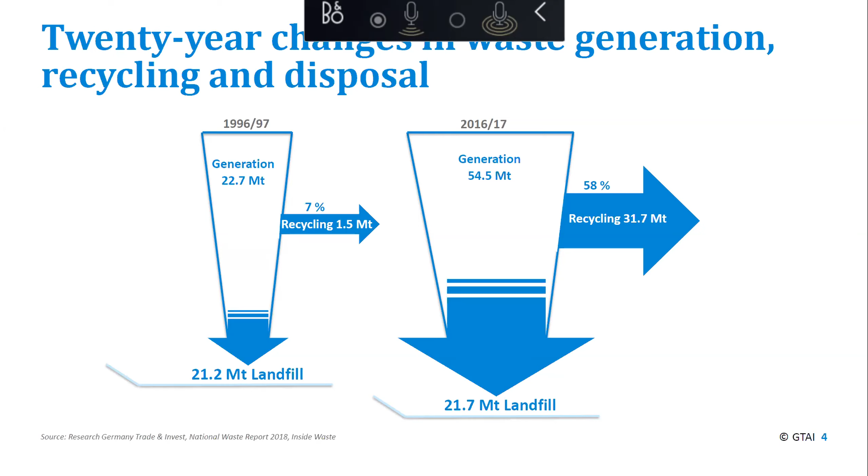When we then have a detailed look at the recycling data, it's very interesting that there are quite significant differences between the recycling rates in certain waste streams. For example, construction waste and metals score very high recycling rates. Paper and glass are somewhere around the average. And very noteworthy is the extremely low recycling rate for plastics, with only 12%.

But if you interpret this data, I think the most important point is that all these recycling figures include substantial amounts of exports. So that means not all this recycling takes place here in Australia, but these numbers include material that's shipped and supposed to be recycled overseas. For example, for plastic recycling, the export ratio is almost 70%. That means domestically here in Australia, maybe only around 100,000 tons of plastics were recycled.

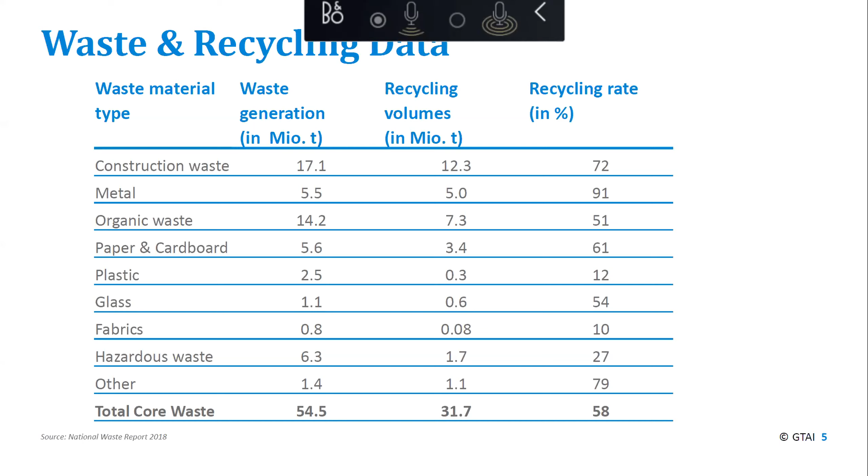And for metals, the export ratio is about 50%. For paper, it's still around 40%. So that shows there is a huge reliance on exports within the Australian recycling industry. And in the last financial year, Australia exported almost 4.4 million tons of waste materials. As you can see, that mainly consisted of metals, plastics, and paper.

And when it comes to plastics, this also included large amounts of unsorted mixed plastics, which are often highly contaminated. Like other waste, most of these mixed plastics were in the past mainly shipped to China. That then, however, changed dramatically when China imposed harsh restrictions for waste imports, limiting the acceptable contamination levels to 0.5%.

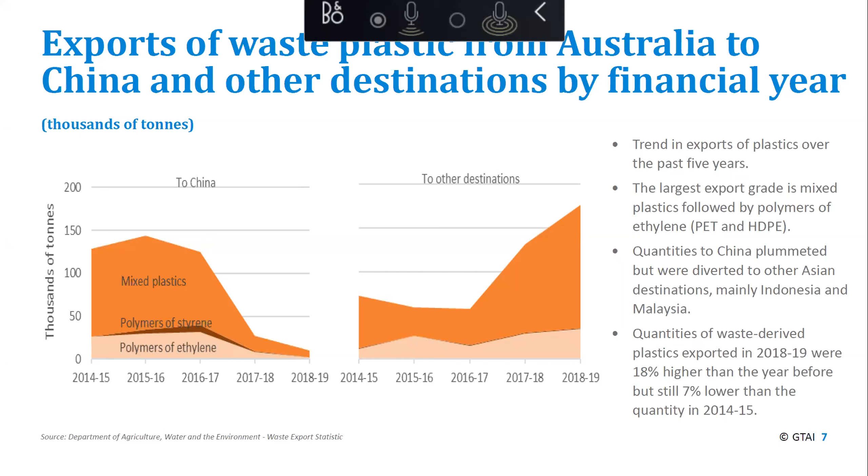But Australia then found other destinations to export waste. For example, we see a huge increase in waste shipments to Indonesia, Malaysia, or other Asian markets like Vietnam. But this high reliance on exports in the Australian recycling industry becomes more and more unsustainable, because other countries are now also starting to restrict the import of waste.

Therefore, the Australian government responded with an ambitious national waste policy, which stipulates numerous targets. A key measure is the implementation of export bans for certain waste streams, and moreover, the national waste policy also aims to achieve an average resource recovery rate of 80% by 2030. So that would mean an increase by 20% from the current level.

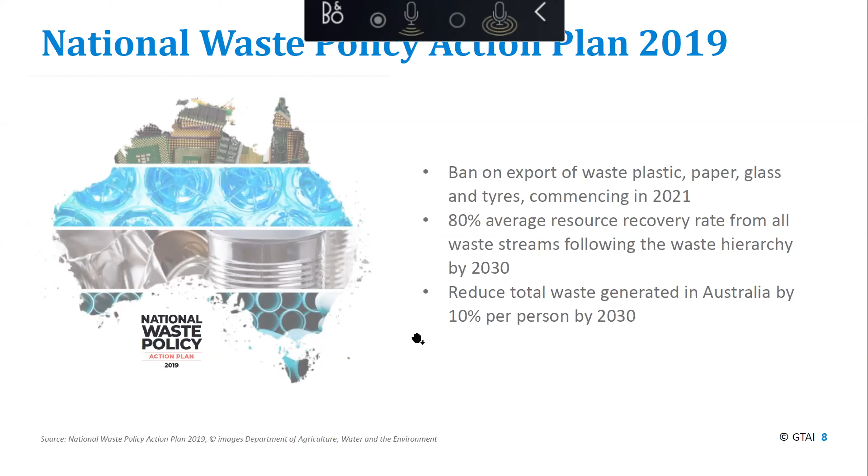These mentioned export bans will be implemented in successive steps. The whole process will start in January next year with unprocessed glass, followed by mixed plastics and tires. And a very important step will then be in July 2022, when the export of sorted single polymer plastics will also be banned, and eventually mixed paper will also be subject to an export ban.

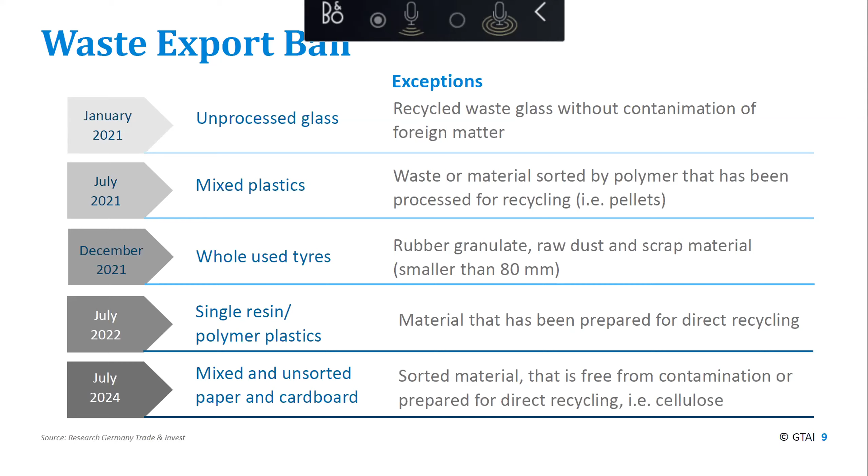But it's very important to note that these export bans are not all-encompassing. They mainly relate to unprocessed materials. For example, in the case of plastics, it will still be possible to export materials that have been sorted, washed, and reprocessed for further use, for example, in the form of pellets.

The important thing, however, is that this capacity to sort and reprocess all this waste does not yet exist here in Australia, and therefore must be built in the coming years. And therefore there's a significant requirement to invest in domestic recycling capacity. So the export ban alone means that Australia must handle an additional 650,000 tons of waste per year.

So to facilitate all this required investment in recycling capacity, the Australian government established the Recycling Modernisation Fund, which provides direct cash incentives for investment in recycling capacity. This fund is provided with $380 million. The federal government in Canberra contributes $190 million, and the rest is contributed by the states and territories, who also administer these funds.

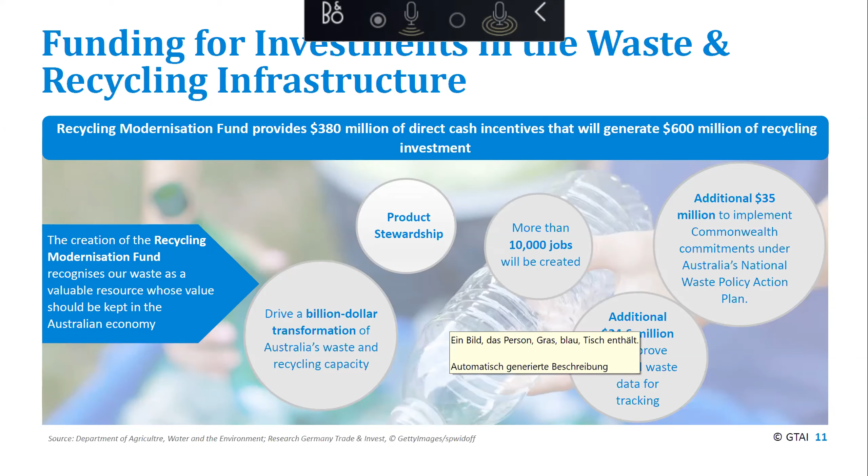So this, of course, also offers opportunities for German companies to provide solutions for the challenges in the Australian waste industry. I don't want to go too much into detail here, but one challenge is commingled and highly contaminated municipal waste streams. In the current situation, many Australian households, for example, have only one yellow recycling bin where plastics, glass, metals, and paper are collected together, and this leads to high contamination levels, for example, with glass fragments.

And many material recovery facilities in Australia currently still lack sufficient equipment to sort these contaminated waste streams. So there are huge opportunities to provide sophisticated sorting equipment. And of course, also the demand for plastic recycling equipment will increase. For example, there will be increased demand for washing machines or machines for pelletizing plastic.

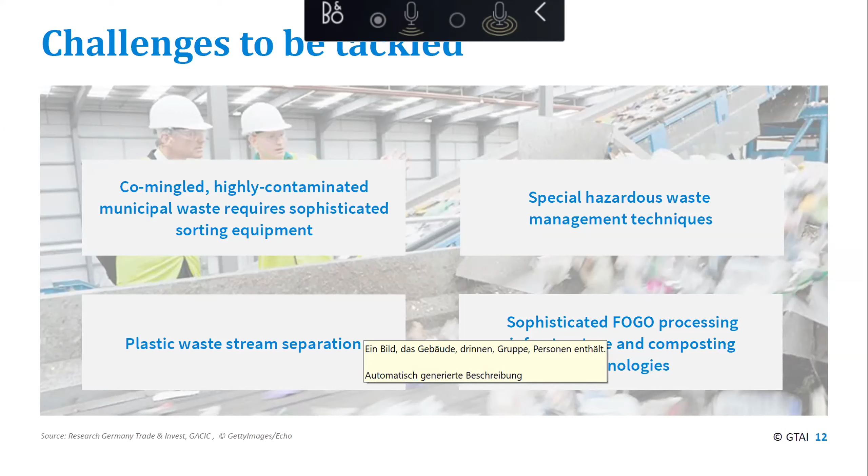But it's not only the government that starts initiatives to improve recycling, also the private sector joins in. One example is the Australian packaging industry, and via its industry body, the Australian Packaging Covenant Organisation, the sector formulated the so-called national packaging targets for 2025. There are a number of ambitious goals, for example, to increase plastic packaging recycling to 70% and ensure that there is an average recycled content in all packaging that comes to the market of at least 50%.

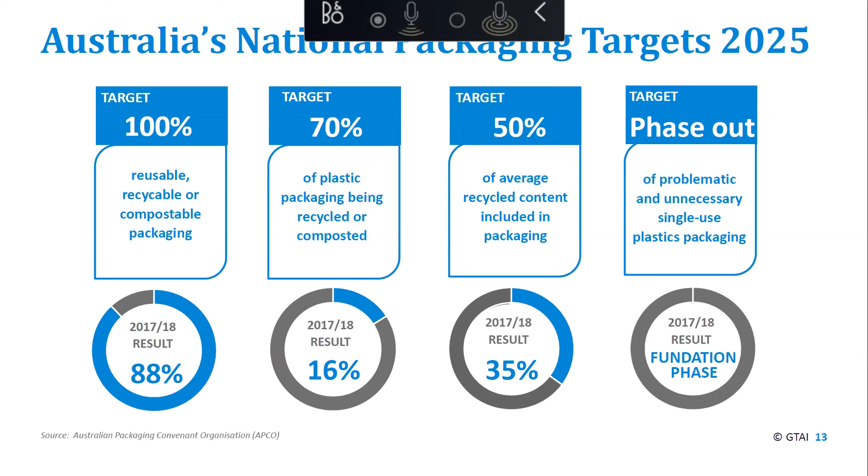To achieve these targets, there is still a requirement for increased efforts. For example, the latest results show that the recycling rate for plastic packaging is only 16% at the moment, and that packaging only consists of 35% recycled content. So there is still a lot to do, but the Australian packaging industry rises to the challenge, and many companies start activities. For example, packaging giant Visy intends to invest $500 million in the next years.

Visy just recently bought the glass manufacturing business from the American company Owens-Illinois here in Australia, and intends to increase the recycled content of glass bottles from currently 1/3 to 2/3. So company boss Anthony Pratt already announced that he will invest to upgrade the technology of these Australian glass manufacturing plants. And the Pact Group will invest $500 million in existing and new facilities to increase recycling.

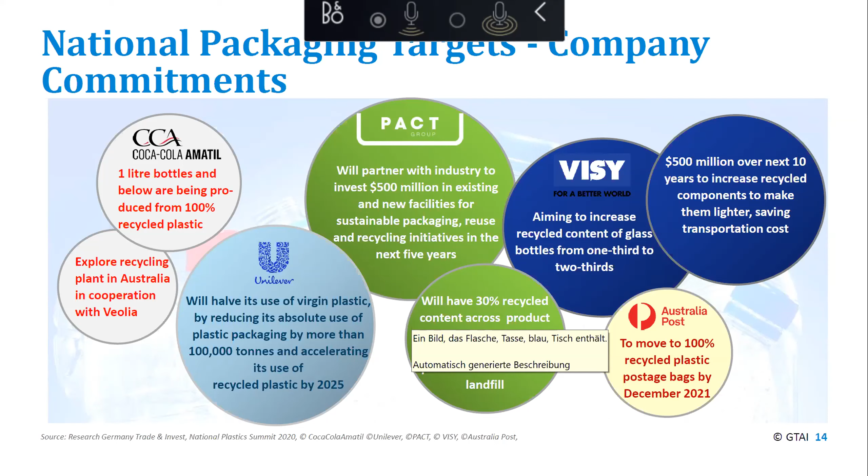One major project is a new $45 million plastic recycling plant in Albury, which is constructed together with joint venture partners like Cleanaway and Asahi Beverages. And this facility will recycle more than 20,000 tons of PET bottles per year. Also, Coca-Cola mentioned plans to build a plastic bottle recycling plant in Australia together with French company Veolia, although there are no confirmed details yet.

There are also many initiatives from supermarket chains. For example, Woolworths works to reduce packaging in general and also wants to increase the recyclability of its private labels. Coles reported that it already diverts almost 80% of its waste from landfill, and Aldi also pledged to drastically reduce plastic packaging in the next 6 years.

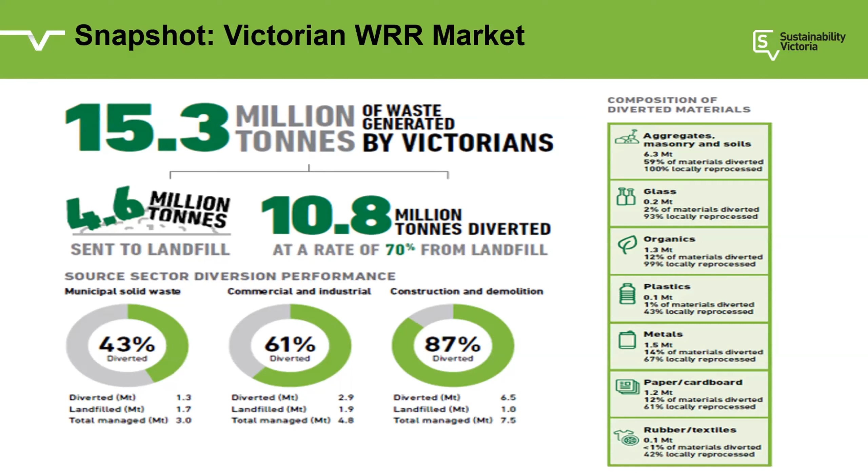Again, Heiko's covered this well already, so I won't really speak about it. Just to say that obviously it's a 4-stage process. The ban's coming in place starting in January of next year, and following on from the China Sword policy, we have also seen stricter measures being implemented by Southeast Asian markets, where we would export our plastics particularly, and that's where we would have an effect. So what this really means is we're going to have increased waste material here in Australia, and this opens up large opportunities to recycle and reprocess these materials, and I'll go into them in a little bit of detail.

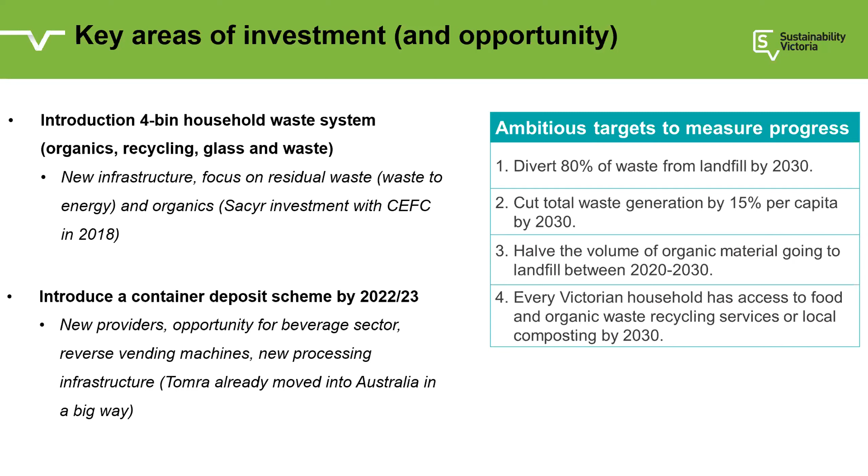So I just wanted to touch on the waste to energy, as I'm sure plenty of people listening today are keen to understand what Victoria is looking to do in this space. So the good news, the Victorian government is interested in investing in this space, but is keen to see best practice in the state.

But the government has also indicated that it does not want to see this happen at the expense of recycling materials first and foremost. And to this end, the policy sets out a cap on the amount of material that can go to thermal waste to energy facilities at 1 million tonnes per annum. This is still being developed at the moment and in consultation, and a policy statement by the Victorian government should be released by the end of this year or early 2021.

Now, to note, the cap does not apply to pure organic streams, for example, being treated by anaerobic digestion. And as I touched on earlier, there will be a $10 million waste to energy fund targeting these organic waste energy projects coming out early next year. There is also a commitment by the government to review that cap regularly.

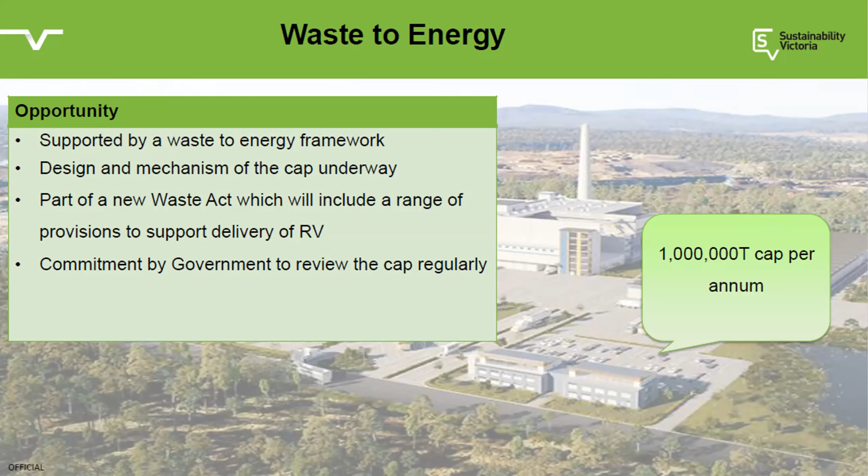So the next couple of slides, excuse me, I just have a drink of water.

So the next couple of slides speak to the key materials that are being targeted under the Recycling Victoria policy. And these are basically areas where we do not have the capacity currently within Victoria to meet the upcoming export bans. So plastics, the opportunities will be in reprocessing capacity for all types of plastics, but particularly plastics 3 to 7. So we do have a mature enough market on clear PET, so food grade, but we really have opportunities in polymers 3 to 7.

And as Heiko said already, there's opportunities in separating the polymers to meet the export bans, and also there will be opportunities in remanufacturing the plastics, as 63% of all plastics that are recovered already in Victoria are exported for recovery. And it is anticipated by 2025, we will need an additional 280 to 300,000 tonnes of capacity for plastics.

So paper and cardboard, as you're probably well aware, it tends to need larger scale investment. So there's large scale opportunities for paper separation at the MRFs, but also pulping facilities. There's also additional capacity to manufacture packaging materials such as tissue, eggs, and boxes being the obvious one.

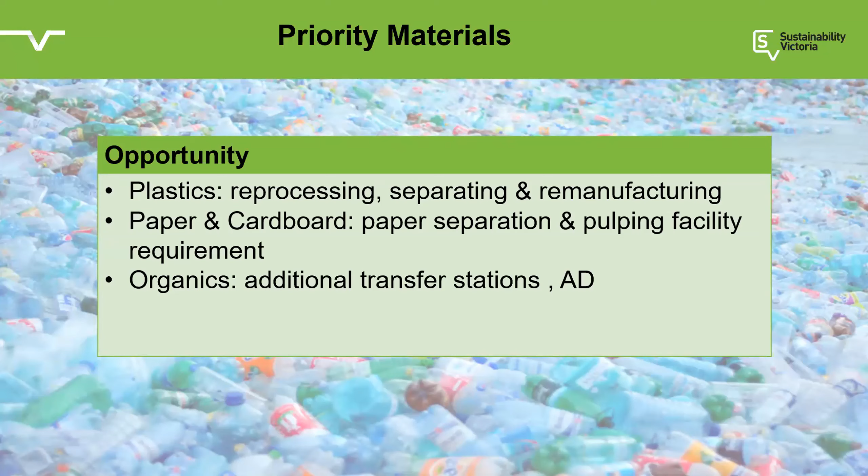When it comes to glass, it's not as critical as it has been in the past, and this is mainly due to building up capacity in the market through the likes of Alex Fraser, who are processing lower grade glass into a bitumen supplement to be used in road construction. But there is opportunities with the new curbside glass bin and the container deposit scheme. We're going to need additional beneficiation capacity in the state. So there is existing bottling plants here within Victoria, and there is opportunities to provide beneficiation glass to these bottling plants. With tires, there's opportunities to process the crumb granules and powders to meet that export ban again.

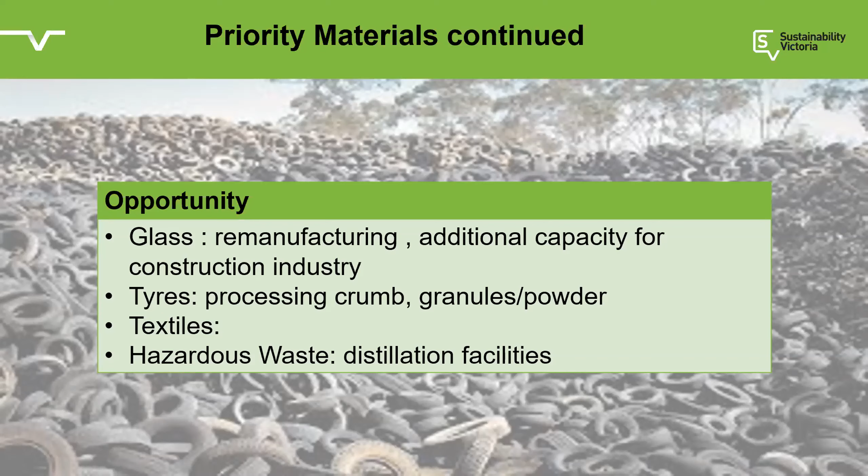And then when it comes to textiles, we have small niche projects already up and going in like carpet recovery, but there's a critical gap in the market with the majority of textiles going to landfill, 98%, and the government does have an appetite to recover, and there is significant opportunity to increase that recovery. And then lastly, hazardous waste. We already have a funding program up and running, as we discussed earlier, but there is opportunities to increase the capacity to safely and effectively manage solvent waste, such as expanding distillation facilities.

So in summary, there is sector and policy changes that are transforming the waste industry in Victoria. There are significant government funding programs underway and being rolled out. And there's investment opportunities available both now and into the future to meet the capacity requirements Victoria needs. And lastly, I would encourage you to get in touch regardless of what funding may be available now or into the future, and we can speak further on any investment proposals you may have.

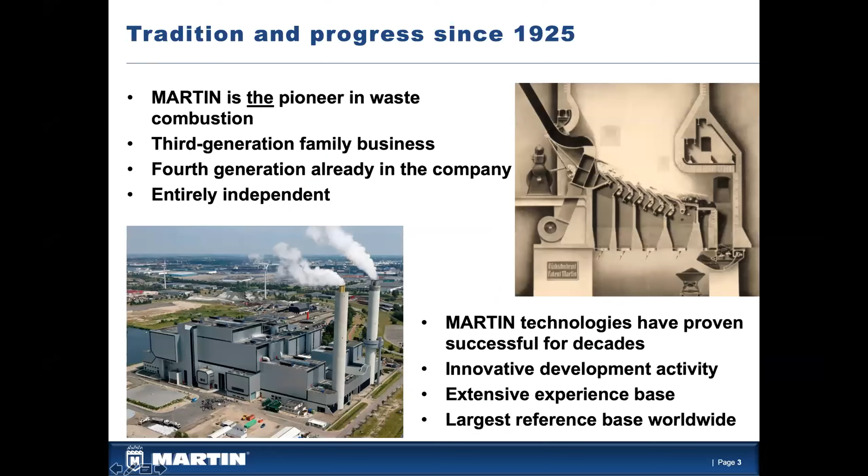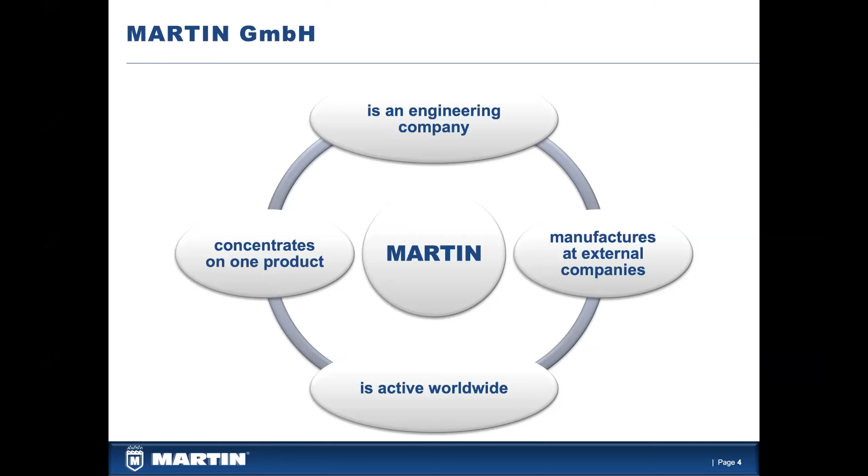That's a picture of the Amsterdam plant. So German companies as engineering companies come here with the technology to manufacture and produce waste to energy plants worldwide. The waste to energy plants are a main part of our work, plus composting. And I will go to this in more detail a little bit later.

We, as Martin Biopower, are the 50-50 partner of Martin. Martin, of course, is a Munich company, and we practically are offering to build turnkey plants and deliver key equipment. And we want to work together as much as possible with local manufacturers.

I don't want to go too much into detail of the technology, but I show a little bit a typical plant, and that will be interesting for the audience because that is practically where German technology will be brought in. So you see, if you don't know how this kind of plant works, on the left side, the waste comes in with trucks, then you have a bunker. The waste is taken from a bunker onto a grate. You see this as number 3, where the waste goes in, which just rests for 3 days. Then it's dry enough and taken into the system.

In the system on the grate itself, it is burning. Air is used, and in this process, then the main process starts. One part of it is converted into energy that can be used in different ways. I come to this later. Electricity, steam, all sorts of energy can be used.

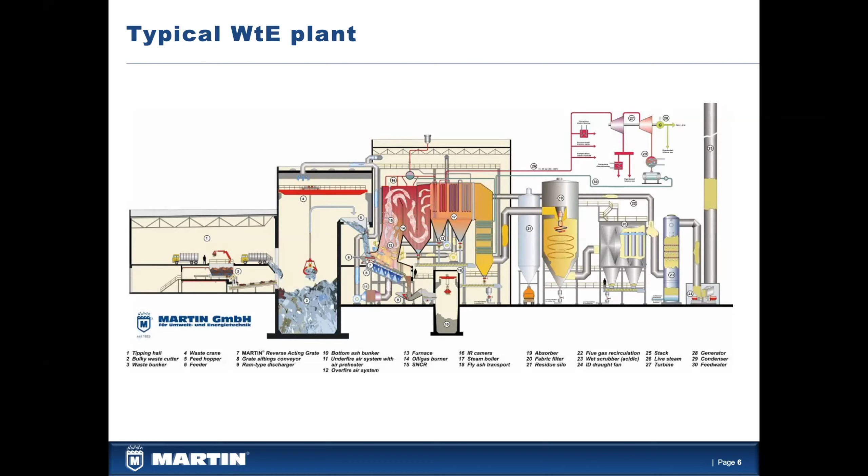The capacity of this, just to give you a little size. I don't want to go into the technology because that's not interesting for our meeting today, but the size can be seen here. This is not a very tall or very small man. We deliberately chose a very average man of 1.78 meters so that you have a good feeling for the size of such a grate in the middle compared to the picture I showed you before.

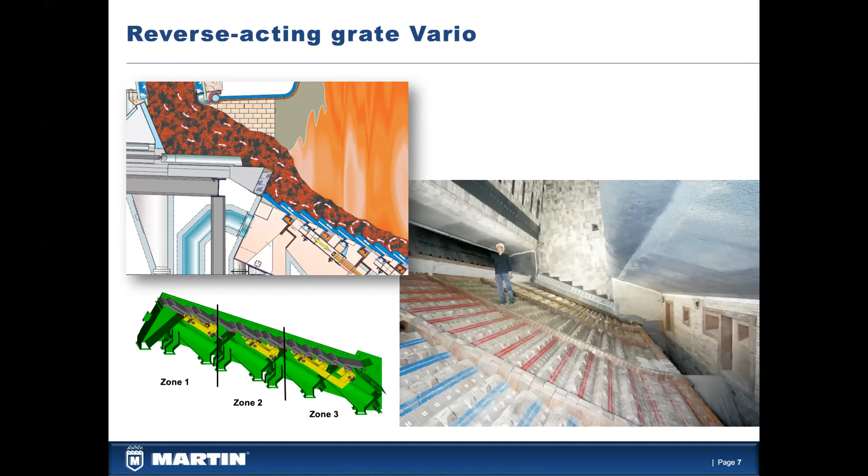In Australia, we use the same structure as the EU waste hierarchy, and I show you where we are here in Australia as well, because in Australia we have, of course, prevention, reuse, recycle, recovery, and disposal. So the question is, and that is something Kieran just mentioned, that when we have more waste to energy, then we have less recycling. And that is a myth.

That's unscientific. And it's unfortunately something I've been fighting since I came here, because every science in Europe shows that when the conditions are good for recycling, then the conditions are good for waste to energy. When the conditions are bad for waste to energy, then we have predominantly landfill. Why is that so? That's very simple.

Nobody, not even the waste to energy industry, wants to take anything out of the recycling stream. Why? Most of the politicians stand in front of me: oh, we're taking away your product. No, recycling is not endless. Everything will go in the end into waste to energy or into the landfill, because I saw Heiko's picture saying we have 40, 50, 60% of recycling. Now that's true when you calculate what comes into the recycling company at the front door.

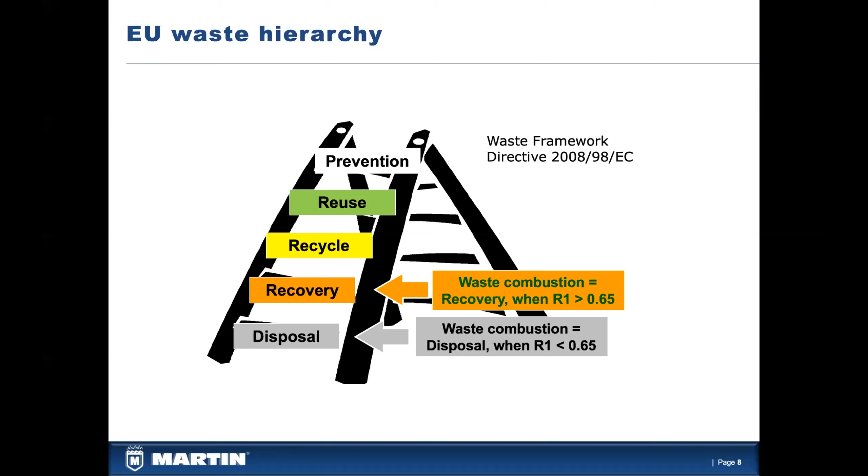So what we really want to do, and that is how I started in this industry before I came to Martin, is use the energy from waste to energy to bring it back to the recycling industry. So I, for example, started with a project in Switzerland, which is called Recycling Park. And in the center of this recycling park is a waste to energy plant.

And recycling companies, who most of the time are very energy intensive, came into the neighborhood so that they could take, for example, the steam directly off, so that we did not have to convert the steam into electricity and then reconvert it into power in the companies, but they came directly into our neighborhood.

And so the typical way, when you do it well, with a good design and with a good structure, is that the raw material goes into recycling, and what can't be recycled goes into the waste to energy, and the energy out of this, in a perfect world, goes immediately into the recycling structure. And with this hand-in-hand work, circular economy can be taken very, very seriously.

Of course, we have heat, especially in Northern Europe, used for heating of households, but a huge project here in Australia, and we started with that, and the waste to energy technology started with us in Vienna, will be the cooling of CBDs, because when you can produce heat, every engineer will know this, then you can produce cooling as well, same structure.

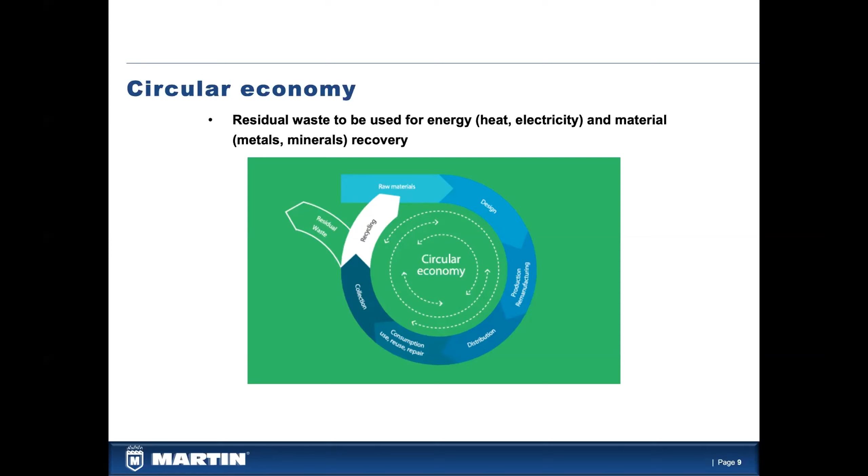So in the future, there is a huge chance, and I had already discussions with Brisbane about this, to substitute the building by building cooling system by a central cooling system for CBDs. That would be massively an advantage to our ecology, and would help us save so much energy to cool our offices in a country which definitely needs cooling.

Just to see the correlation between landfill and waste to energy, just an overview, and Eurostat is bringing this up again and again. So the correlation is very simple. You can see it in Germany. When you have a very low rate of landfill, then the country has a price structure which enables the industry to start with waste to energy, and the same structure then enables recycling and composting.

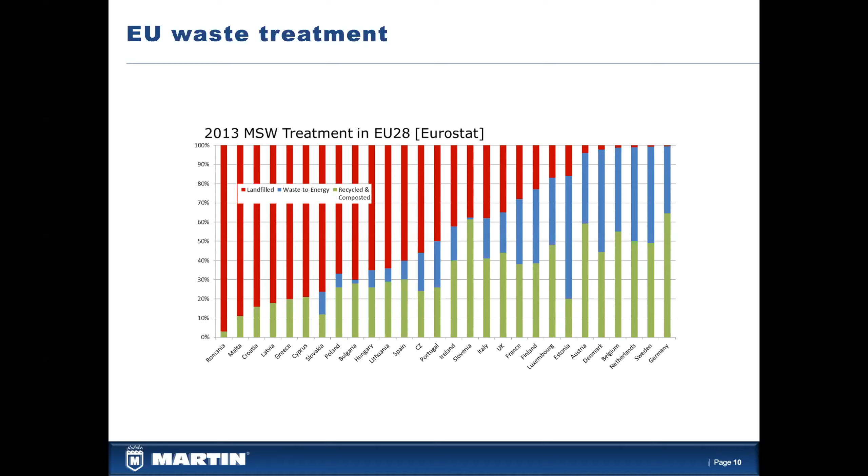Countries like Romania at that time, who have no structure for that, no finance for that, have very, very low rates of recycling, no waste to energy, and work practically exclusively on landfill. And I think this Eurostat number shows very well that there is a huge myth in the world that countries who decide for recycling will decide against waste to energy. It's the opposite. Countries who want to go strong in recycling will produce conditions which are good for waste to energy, and vice versa.

Just to show you that Australia is the only continent where we are not; even in Africa we have plants in the meantime, because it's an older slide, which I used to make everything shorter today because I only got 10 minutes. Therefore, I just show you that our company has 431 plants, more than 822 lines. Practically a third of the worldwide burned waste is in our structure. So what we want to say is Australia must hurry up, must hurry up.

We're still in the situation that Australia does not produce the conditions as an entire country. In Western Australia, it's a little bit better, to start overall waste to energy as the real solution for what we can't recycle. I still have the hope that in the next 3 to 4 years, politicians will see this.

And I think it was great to see the examples from Heiko and Kieran. A couple of years ago, I was told, we solve it with China. It's much, much cheaper for the country. No, it's not. It's political suicide, because at that time it was China who could close the door from one day to another. And I remember when in October 2017 that was in the media, everybody panicked, because 3 months later the borders were closed. Now we solve it here, we "solve" it, in apostrophes, by bringing it to Malaysia and Indonesia.

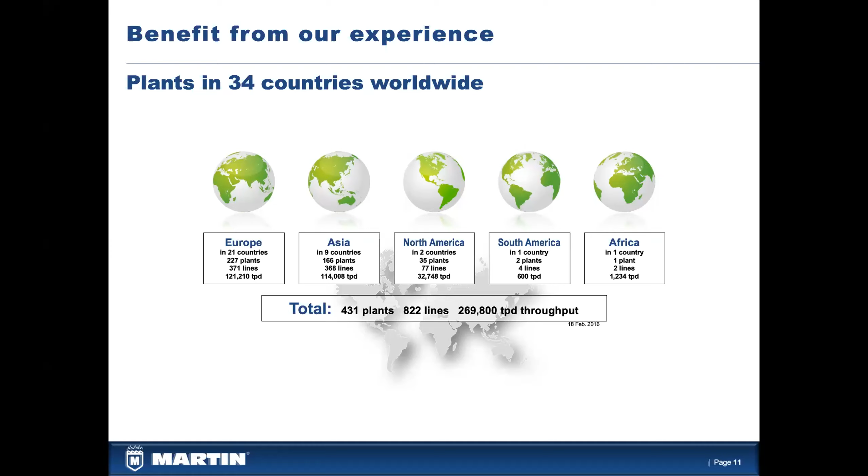I don't want to go through the possibilities, but good technology, cutting edge technology, can burn practically different calorific input. It's very important to use technology which is flexible, because the waste stream changes every 3 to 5 years because of political reasons and technology reasons. Therefore, I agree with Kieran. It has to be the highest possible technology, so that an investment of 200 to 600 million Australian dollars is properly used.

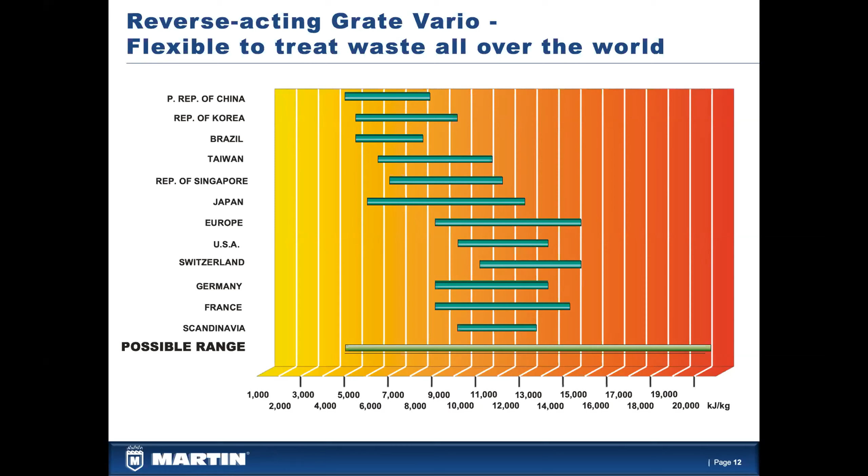In this case, it means it must be flexible to adapt to changes which will come in the waste. And here again, the technology we use is the most flexible technology in the world, and therefore we have more than 33% of the market in Europe.

The benefits, just to summarize: we divert from landfills, we lower greenhouse gas emissions. The energy contained in waste can be captured and reused as electricity, heating, cooling, and process steam. All plants are designed according to EU standards and operate well below emission limits. In Europe, we are at approximately 12 to 15% of the emission limits.

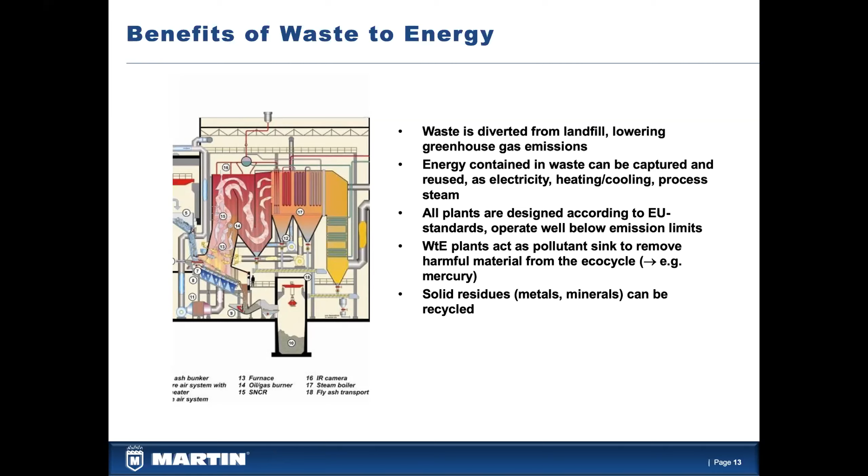And waste to energy plants act as a pollutant sink to remove harmful materials, unlike landfills. And the solid residues, for example, in our structure, you see the ash and the metal coming out on the ground here in number 10, can be completely recycled.

I jump over it because Enrica is already looking at me because I'm running out of time. Just a bit aware of time. No rush though. Just skip over it.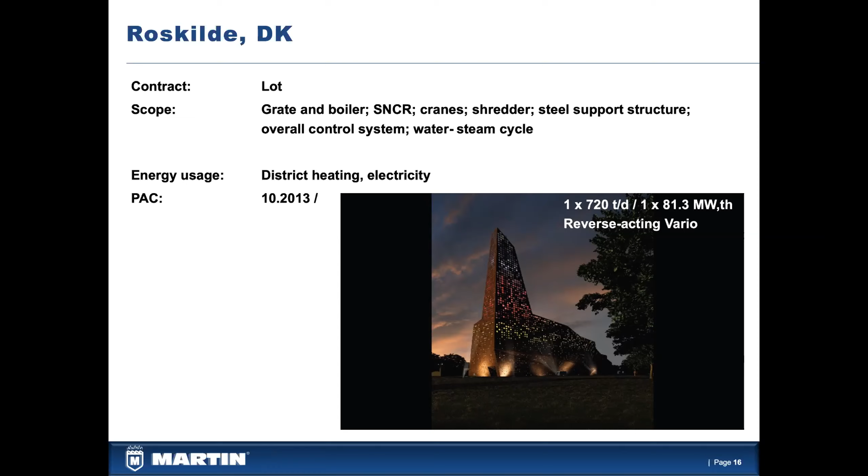So we came up with a solution and built this, which is an LED structure. And every day, we burn the candle down. And that is a huge tourist attraction in the meantime. And then 4 years after it was finished, we got a reaction from the bishop, who said he was now angry with us because more pictures are taken by night of our waste to energy plant, which is vis-a-vis the dome, than of the dome. So technology can be used, and of course architecture is always a question of pricing.

What I want to show you is that waste to energy is not isolated. We combine it with Thöni technology, but you can combine this with any other technology as well, the dry digestion system. The dry digestion system, like here in a container structure, with huge paddles mixing up the waste which we put in there, with the target to compost and produce energy. This structure has been used by us in Germany for many, many years. The idea behind this is very simple, and we produced something in Augsburg which is an interesting structure for you.

In Augsburg, we combined a dry digestion system with the waste to energy plant, and we put them next to each other so that the city of Augsburg now can use the steam produced from the waste to energy to heat the dry digestion system. And we again use the gas from the dry digestion system to burn in our chamber. So this is a practically perfect cycle between the two structures, which shows that producing compost at the highest European level here in Australia is still very, very expensive.

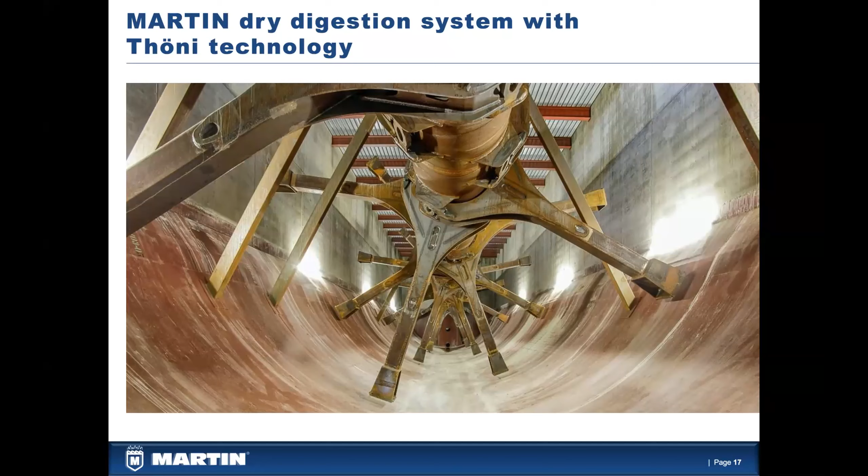We go in very, very small units, which is good for rural areas, but not so good in cities because the price goes up. So we try to implement something here in Australia overall to connect dry digestion systems with Martin technology, or if a city does not use our technology, with waste to energy technology, and combine these two flows to achieve that not only nothing goes to landfill, but that dry digestion systems are affordable for our society to make as much as possible and reuse as much as possible from our waste stream.

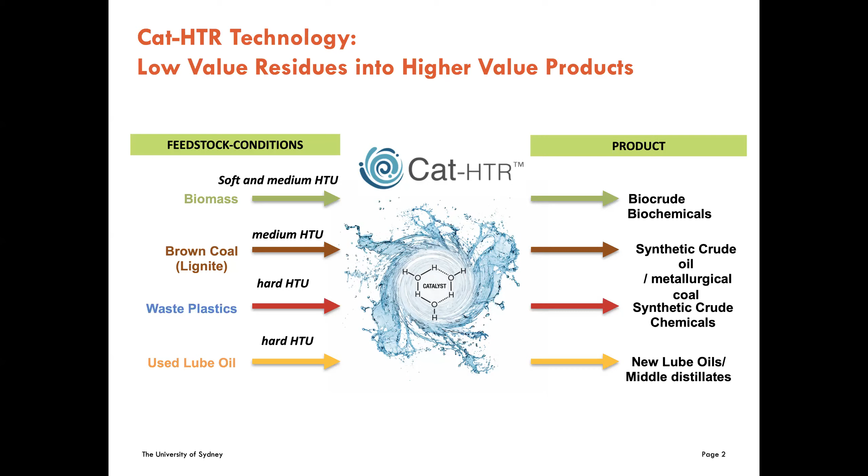So I have developed a new technology called catalytic hydrothermal reactor technology, and now there we are. What that allows us to do, it's an aqueous-based system, and it allows us to take a whole range of different feedstocks, biomass, waste plastics, mixed waste plastics, used lube oils, and convert that into a variety of products. And we have a variety of tunability within that process to take care of the different inputs. And really, this whole thing is designed as a catalyst to change the conversation so that we don't talk about waste, but we talk about resource.

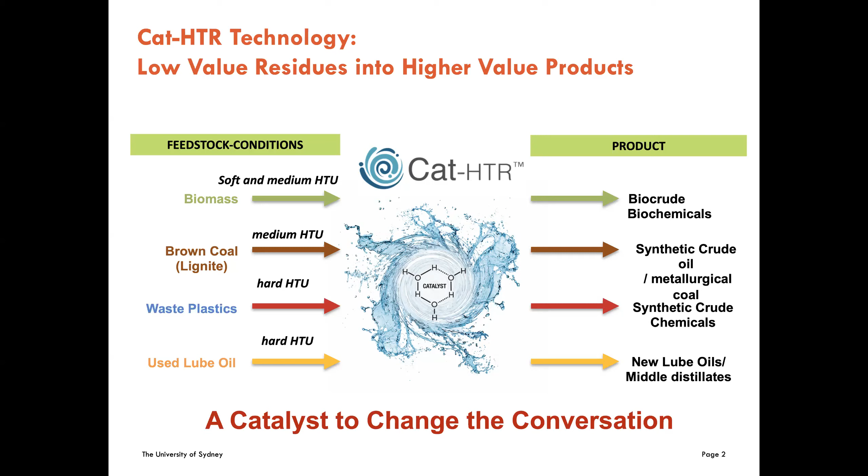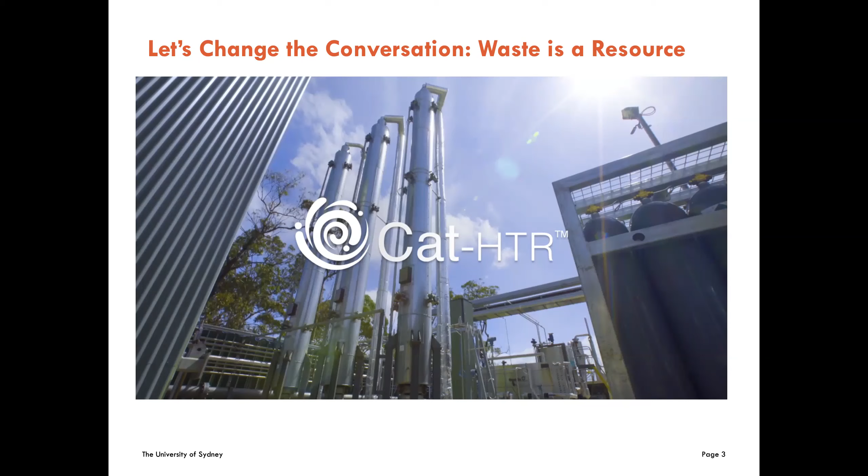It is not cathedral-like, but maybe a little bit cathedral-like, at least in my eyes, our demonstration plant in Sydney, or in Somersby, 10,000 tons a year. So we are able to do all the things that I will tell you about. And if you want to come and visit, you can touch it, you can feel it, you can sniff the product. So we are able to look at biomass as well as plastics. So I'll talk about both very briefly.

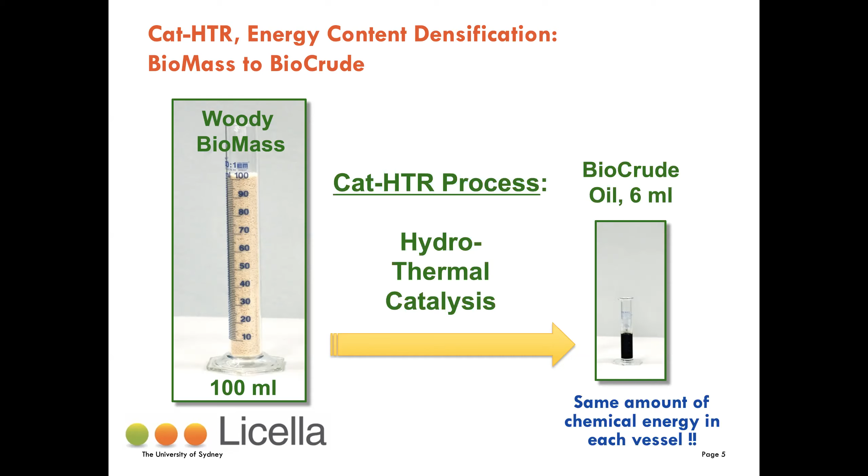Effectively, what we do is we take woody biomass. Here's just some sawdust. It goes through our process, and what comes out is a bio-crude oil, and this is done to scale. So it's the same amount of chemical energy in that little bit of oil as it is in that woody biomass. Obviously, I'm cheating slightly because the sawdust has a bit of air in it as well, but you can see we are in a very highly energy dense situation. So what was not easily processable is now a dry, storable, blendable oil that I can process in a whole range of different ways in refineries.

And this is just one way here I'm showing you, what's called straight run gas oil that happens in a refinery, one of those big towers. And if we mix it in, we can see that the thing starts to look more and more ugly. It gets darker and darker because of our terrible bio oil. But if you think of red wine that just has a little bit of color in it, but it's very dark, same with our oil. After the hydrotreating, it looks just beautiful. And in fact, we have letters from Chevron, ExxonMobil, from Shell that allow their refineries to buy any quantity of this oil and refine it in their refineries.

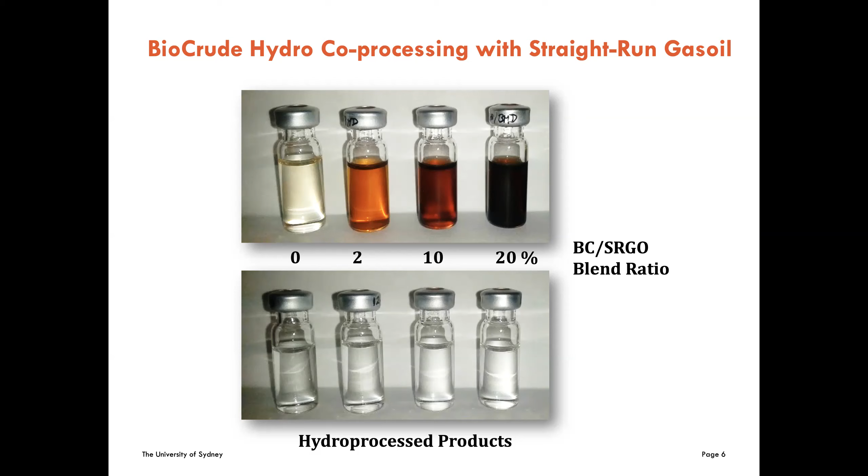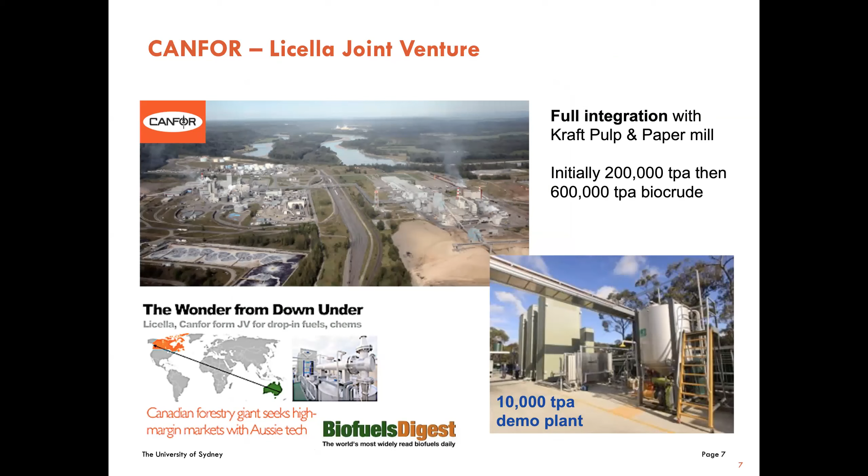So all good. So this is about not burning, in contrast to my previous speaker, but this is about trying to keep the carbon as much as possible within the cycle. So we are focusing on making new materials out of this as much as possible. We're integrating that with the world's largest pulp and paper mill in Prince George in Canada, 6 million tons of trees a year. And our initial plant is 200,000 tons going up to 600,000 tons a year, producing this renewable feedstock for petrochemical processing to make all sorts of renewable materials, whether it's lube oils or plastics or various kinds of chemicals, solvents, etc.

So much for the biomass. The waste plastics is, I guess, something that's on everybody's mind. And having seen some of the previous presentations, it's clear that there's sort of reasonably low-hanging fruit within the Australian environment in terms of the recycling quota that we have for our waste plastics. And you will all be aware of this, I'm sure, that if current trends continue, our oceans will contain more plastic than fish by 2050, and that is something that we really need to avoid.

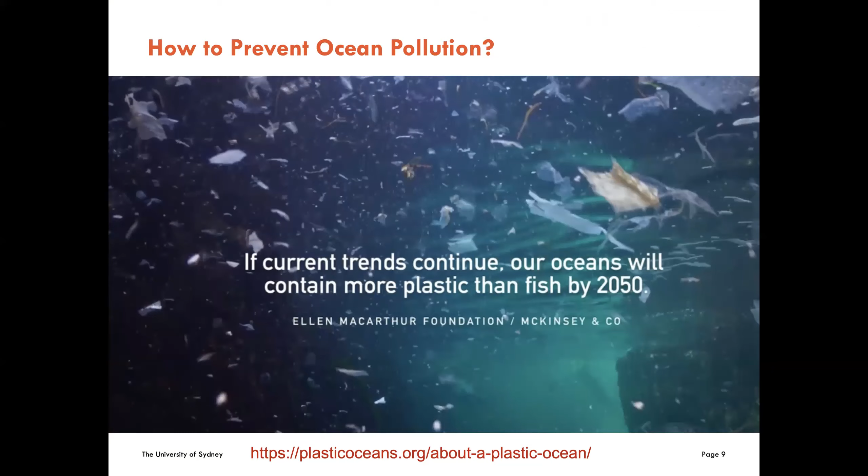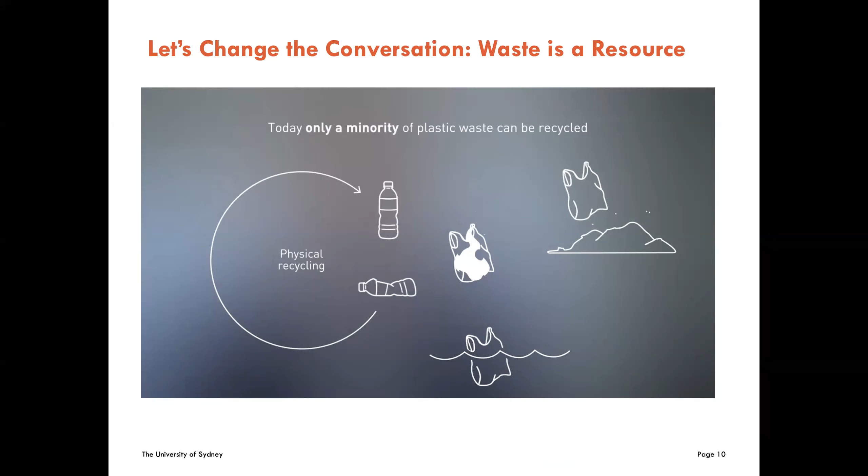Currently, we have physical recycling. PET bottles, to some degree, are quite well recycled, and much of the rest is either put into landfill or incinerated, or indeed ends up in the ocean. So my suggestion, just as the previous speaker, is not to interfere with existing recycling, but offer additional optionality. And what we want to do is what can't be physically recycled, we will take that before he burns it and chemically recycle it to keep that carbon in the circular economy for as long as possible.

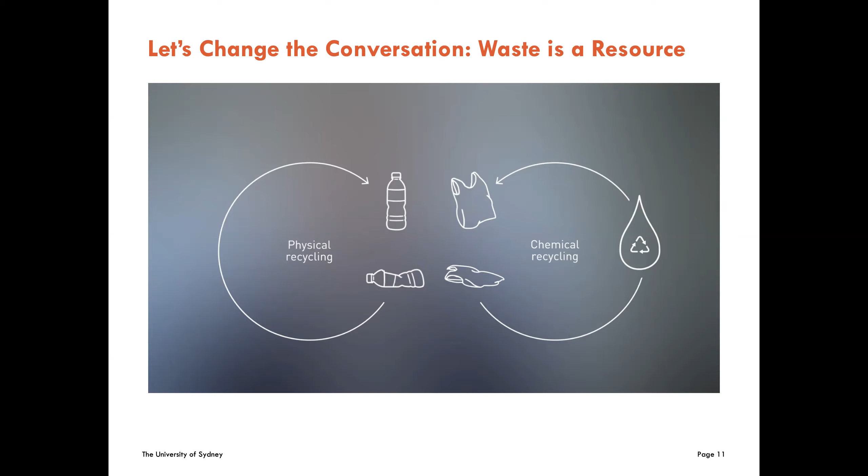So what are we doing? What does it look like? Well, we start with an aqueous plastic waste feedstock, and that's 25% water, 75% mixed end-of-life plastic, the stuff nobody can use, bits of builders' film, all sorts of plastic packaging, etc. And that goes through our reactor. And as we process it, we do make some gases, but those gases are actually balanced so that what comes out is used to make the supercritical steam that we are using as processing medium. So the plant runs itself on the waste.

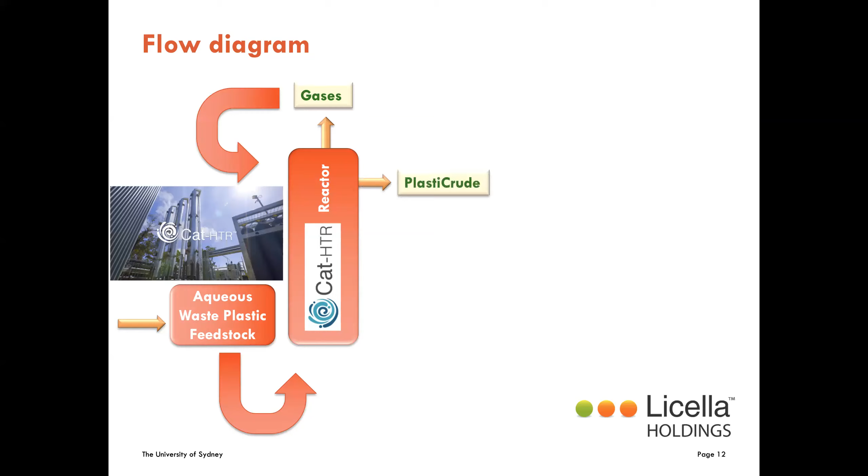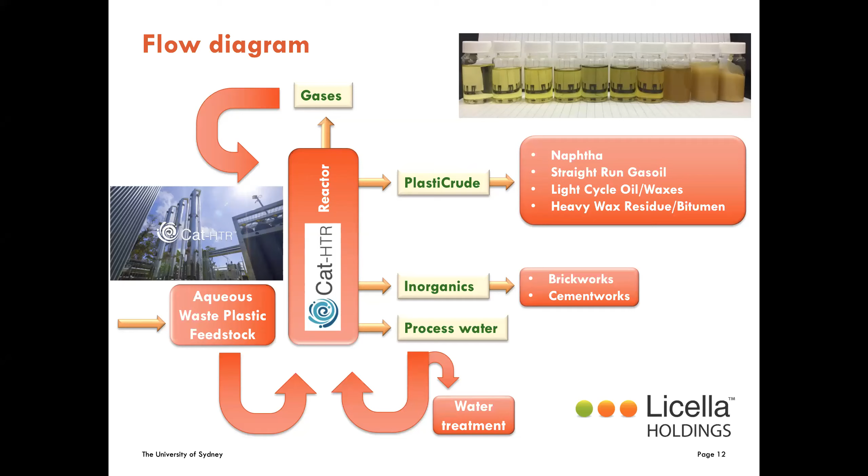Industrial wax is very profitable. And the heavy wax residue, still a liquid, is an excellent additive to bitumen. And we have offtake agreements for all of these things. And the inorganics go into brickworks, cement works, etc. We have some processed water, and this processed water is recycled largely, but at a certain moment we have too much salt and we need to treat it to some degree. But all of that treatment can be done with existing water treatment facilities at industrial parks, etc. So it's a circular economy, so this thing has to pay for itself.

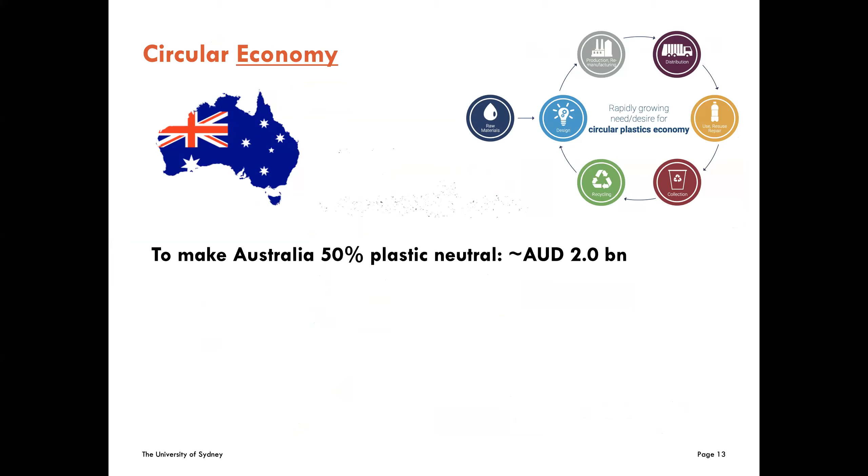So what does it look like? Well, if I want to make Australia 50% plastic neutral, and I'm assuming here that I'm not getting paid to take the plastic, but I also don't have to pay to take the plastic. So the assumption is it's a zero cost input. Then our plants would cost $2 billion to make Australia 50% plastic neutral. You may think, well, that's a lot of money. It's the same price as one of the new submarines that have been ordered, and I think we ordered about 12 or so of them. So I think we could spend maybe the money on one submarine less and make Australia 50% plastic neutral.

How does it come out in terms of the economics? Australia roughly makes about 3 million tons of plastic waste a year on a dry basis. If I say I can have access to half of that, that's 1.5 million tons. Our liquid yields are very high. They're more than 80% on a carbon basis. So that gives me 1.2 million tons of oil a year. That's about 8.8 million barrels. Today it's 53, but forgive me, at a price of $60 a barrel, that's about $500 million a year. So you can see very, very quickly I can pay off my plant.

So the internal rate of return is around 20 to 25%, and that is without subsidies and assuming that all of my product has the same price as crude oil and that I do not get paid to take any of the waste. So it has a lot of buffer in it as well.

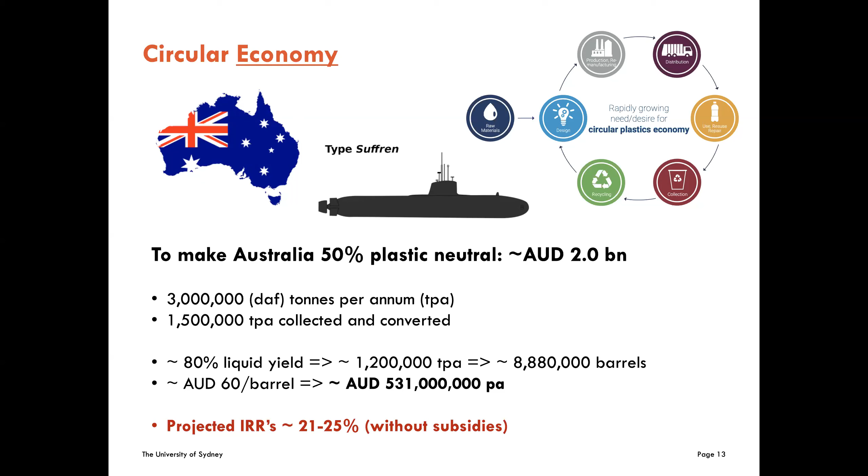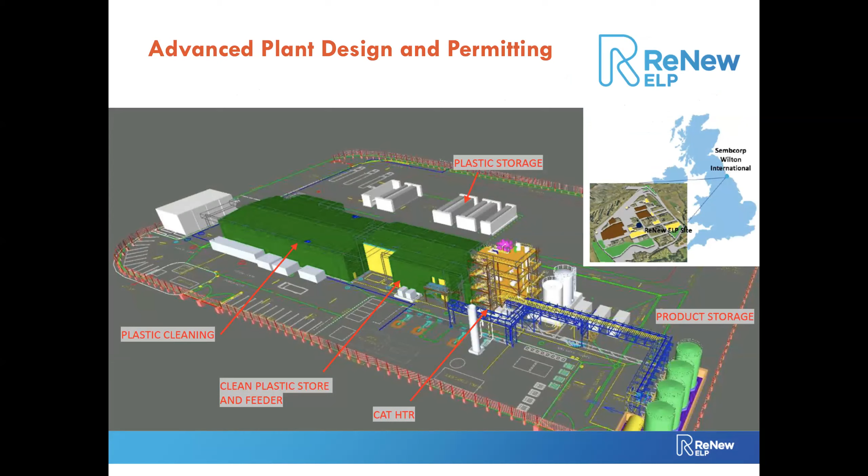We are very advanced in our plant design and permitting. We're building one in the UK in Wilton. What you see, the green is the actual mixed waste recycling facility. In the UK, they're not sorting plastic as well as they do in Germany. The orange thing is our actual plant, and then you can see the various tanks for product storage, etc. So you may think, well, he's a professor, he may have smoked something, can we really believe what he's saying?

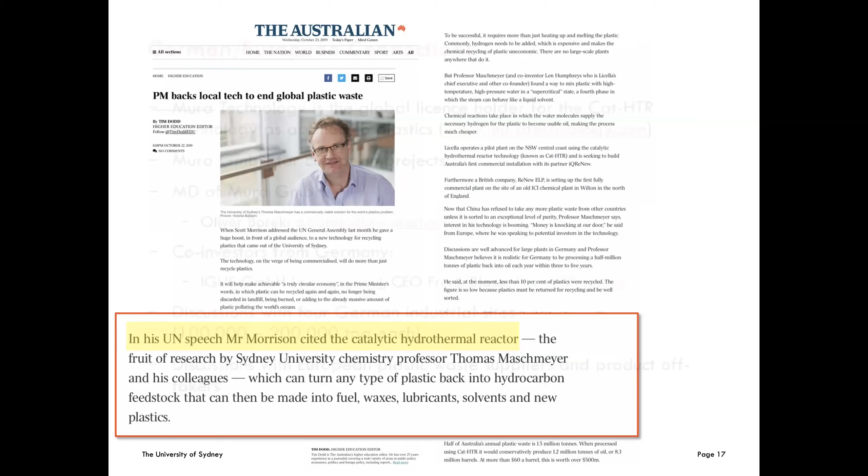But given that this is a German sort of event, I just also thought I'll let you know that we have a global licensee, Mura Technology, for the Cat-HTR technology as applied to plastics. And we have a German sister company, Mura GmbH, for all European projects, and their contact details for our business development guy, our managing director there. We have co-investors in Germany, igus, it's about $1 billion worth of revenue a year of plastic joints for robots. The CEO, Frank Blase, would, I'm sure, be very happy to talk to any of you.

And we're currently in discussion with 4 German industrial parks for plants of 100 to 200,000 tons each. And they are very advanced but highly sensitive. So I can't tell you which they are, although people who know about these things can easily guess what they are. And we are currently lining up access to waste supply and have already lined up off-takers with some of the usual suspects. So that is, in a nutshell, very, very quickly, due to time, what we are doing.

Thank you, Thomas. Wonderful. So we will now open the floor for Q&A. We have received some questions already, whilst the other participants and our speakers might want to turn on their cameras again, just so the audience knows who we're speaking to. I have a question for you, Thomas, that reached us. What pre-processing does the plastic in-feed require? Quite a technical question. What are the limitations to contamination?